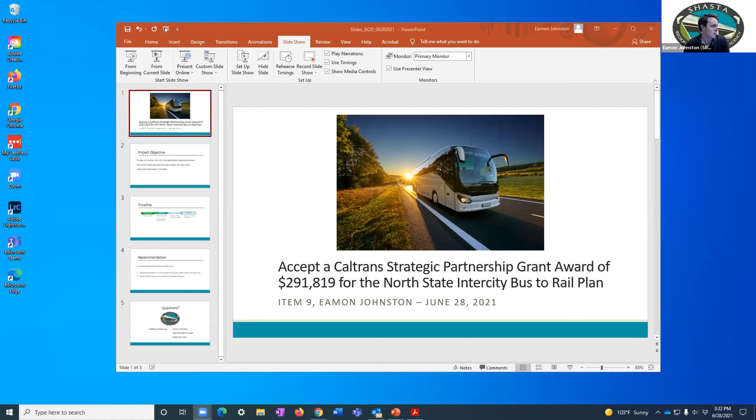So as Chair Watkins said, this is to accept a Caltrans Strategic Partnership Grant Award of $291,819 for the North State Intercity Bus to Rail Plan. The objective of the plan is to look at better intercity transportation options between the North State, specifically Redding to start, and Sacramento and/or the Bay Area along the I-5 corridor.

As a reminder, the timeline of the project is as follows: we submitted the grant application in February, and we just heard very recently, last week, that we were awarded the grant. Today staff is recommending that the board accepts this award.

Next month, after we meet with Caltrans, work could begin on the project. Although we are hoping to finish sooner, the final completion date would be spring of 2024. The recommendation is to approve resolution 21-12, attached to the staff report, accept the award, and direct staff to begin procurement of consultant services. I'm happy to answer any questions about the grant or the award.

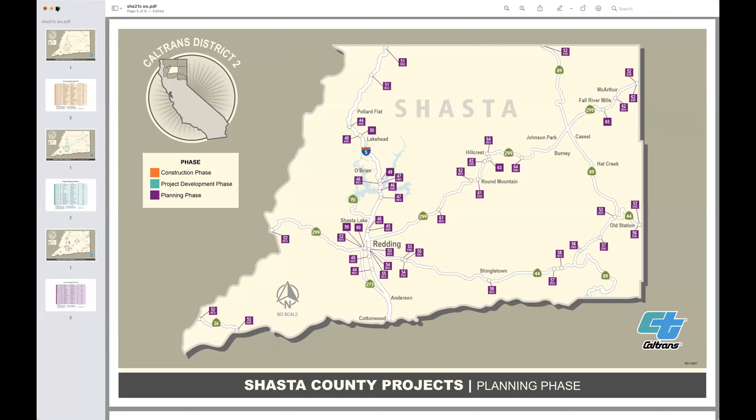I have these maps I'm going to present today. It's one more, there you go. These maps, Amy's going to make sure the board members can get a copy of them so you can look at them. If you have questions, there's names and phone numbers you can call. But what we want you to do is just be aware of all the projects that we're doing.

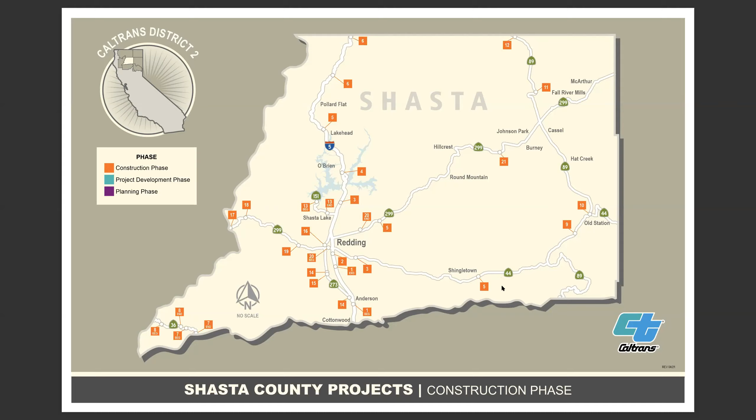So we're going to start right now with the projects that are in construction. Here's a map and you can see the numbers there. And if you go to the next page, there it is, this is what the numbers correspond to. I'll go through a few projects just so we can familiarize ourselves with the map. No, stay on the next page, that'd be better. Thank you. And if you have questions, you can ask.

So the first project I want the board to see is the Razzle project. That's a 3-year construction project, the Redding to Anderson 6-lane, and we're almost done. It's awesome, that job started 3 years ago. This is our 3rd construction year, and you probably all have gone through it. We're on our last phase. It takes 3 phases when you have 2 lanes of traffic going over the bridges, and that's why it took so long, but now we're in our last phase.

They've already placed the girders. We expect construction to complete this year. By the way, it's the other $132 million project here in Shasta County. The first $132 million project, it was kind of interesting, it was the same amount, was the courthouse there in downtown, and we beat them. We're going to be done with ours before them. I thought this was funny. So anyway, that's things have gone well in Razzle.

We've worked with the contractor, so the northern limits of the project, now you can go the speed limit, where before we had that speed limit throughout the whole section of the job, and sometimes people were frustrated keeping at a lower speed limit. But we're able to finish the northern section, and so now we just have that area around Anderson to finish.

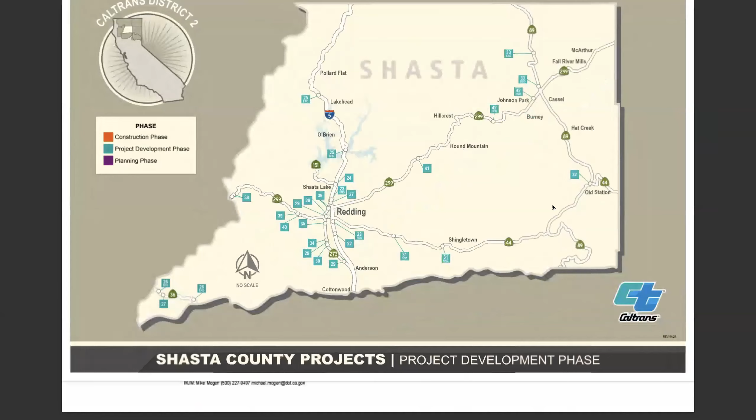Okay, so let's move to the projects in development. Next, same idea - there's the map where they're located. And so we'll go to the next spreadsheet.

Okay, now we talked about Razzle with the last project. Well, the next phase of improvements to get 6 lanes on I-5 is the Fix 5 Cascade Gateway project. That would be 6 lanes of I-5 from Highway 44 to Oasis interchange, and that would be the last improvement needed so that we'd have 6 lanes clear from Cottonwood to the city of Shasta Lake. Just like Razzle, the biggest hurdle that we have in this project is finding funds.

The normal funding process that we have, we just don't have enough, so we're asking for grants. As a matter of fact, we've asked for - I'm not sure I know all the names - we've asked for a $15 million earmark for the stimulus, we're asking for a $25 million federal grant from the RAISE program, and we're probably going to ask for another 20 million from the Trade Corridor Enhancement Program. All those are not guarantees, but we're doing our best to write the grants.

As a matter of fact, the RAISE grant, the federal grant, we're going to be getting the application in a little later next month, and we're all working hard to get that application in. We've had some successful applications, for example, the TCEP, to do the project development, but for the construction part, we still have to get the grant, and that's going to be a big hurdle.

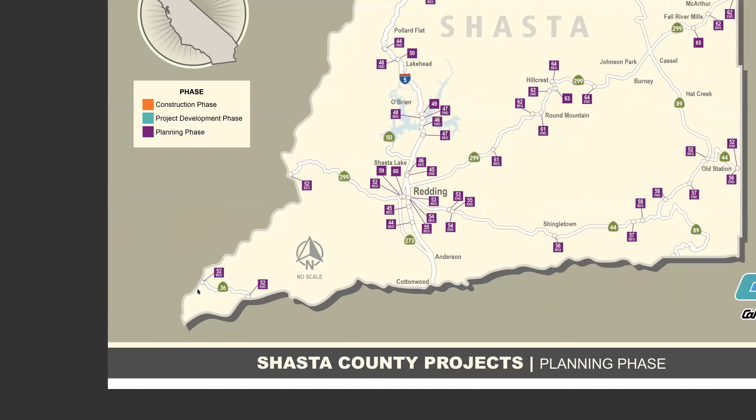So we could move to the last one, and that's the planning projects. We'll just move to the next screen there. There you go.

Now the planning projects - the further out you get, the less certain we are of it. The '22 projects, the '25 projects, we're a little more certain, but none of these have been programmed yet. Once they get programmed, we definitely know that they're going to happen. We're trying to get them ready to be programmed - we call them PIDs, project initiation documents. So these are our kind of long range projects that we have in the hopper, what we want to do.

For example, the downtown Redding CAPM, number 60, there's going to be a lot of complete streets improvements on that one, but that one's way out. For some that are sooner, we talked about the Cascade shop - that's going to be part of the Fix 5 Gateway project. Let's see, any other ones here.

We have some culvert projects on I-5. We have paving out by Shingletown - we call it Shingle Station because it's around Shingletown to Old Station. But anyway, these are all of our projects that we're just getting the PID documents for, or going to, but they're kind of out there at this point, and we'll probably be presenting them later as we get closer to delivery.

One big project I'd really love to talk about, but I can't because the person after me is going to have a great presentation, is the Pit River Bridge. You're going to forget my whole presentation after you hear his presentation because it's really exciting.

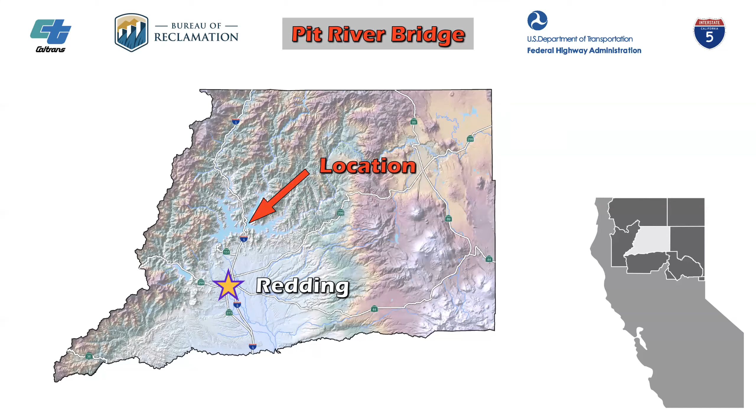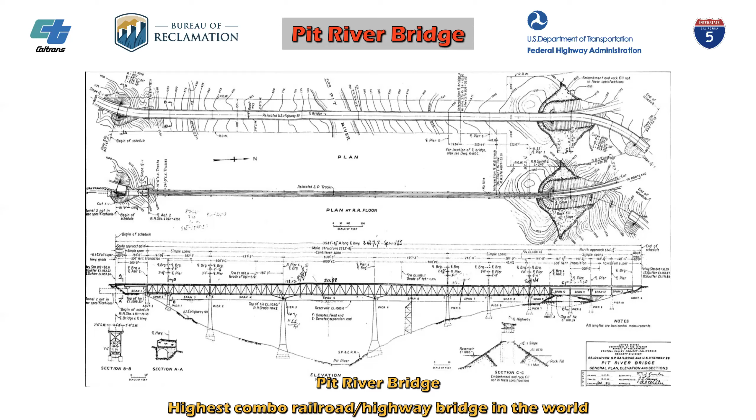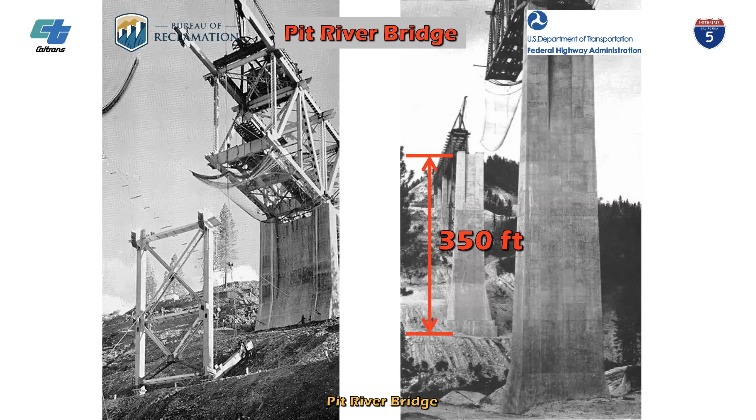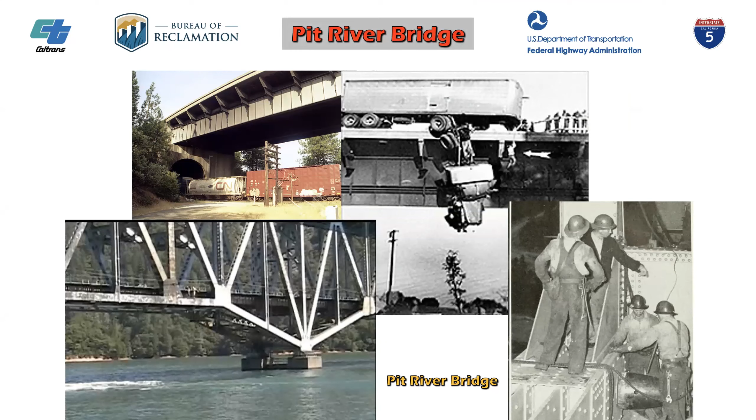Here's back when the bridge was being built, with the original Pit River Bridge in the lower side. There are some other historical photos—look at the scale on the right, how big those members are compared to the size of the people involved.

So some more on the background. As I said before, it's owned by the Federal Bureau of Reclamation, and we share it with the railroad. As many of you know, the Bureau of Reclamation is considering raising the level of the dam to store more water at the lake. We want to make sure it's fully understood that there is truly no nexus between the bridge and the elevation change on the lake—there's no connecting those two things. They're completely separate, and I want to make sure everybody understands that.

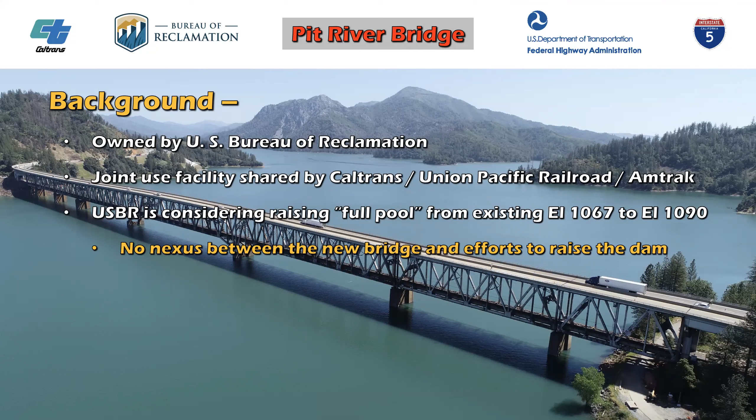So we always have what's called a need and purpose on projects, so I'm going to read this one directly. The needs at the Pit River Bridge and approach roadways include deficiencies in maintenance, operations, safety, and functional use. In 2040, highlighted in red there, the joint use agreement expires, and the bridge owner, the federal government, does not want to own the bridge after 2040.

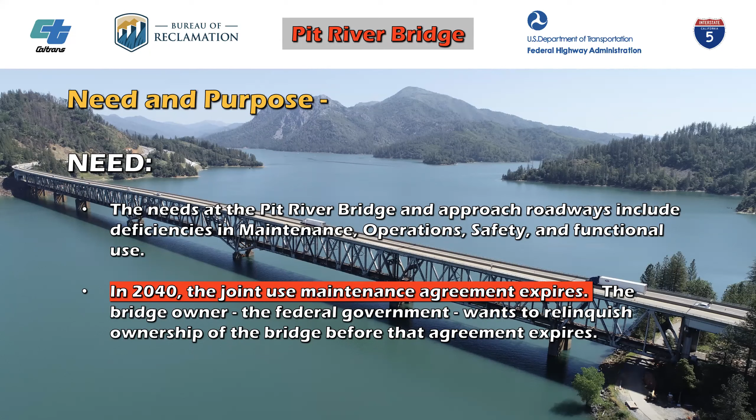Our purpose is to develop a reliable long-term crossing over Shasta Lake that addresses the future operations, maintenance, and structural needs. Long-term, beyond 2040, the interstate highway bridge specifically is not owned by the federal government.

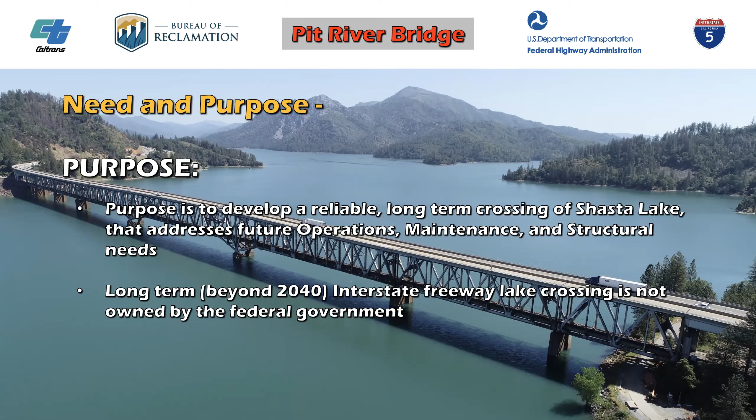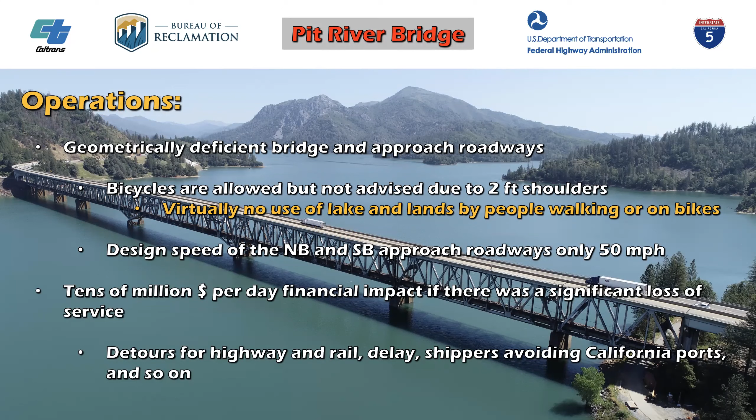I'm going to expand a little on the operations side of things. As everybody knows, it has very narrow shoulders—there are virtually no shoulders. Bikes are technically allowed to cross the bridge, but I wouldn't do it. Anyway, there are other things going on there.

What we've done is figure out what happens if our bridge is not crossable. For instance, during the Delta fire a few years ago, we had issues and couldn't cross the bridge. Here's the detours involved. For highways, it's almost a 60-mile detour to go around through Highway 89 and 299 via Lake Britton—about 60 miles. If the rail can't go over that bridge, the red line shows the LA detour. If the railroad had to detour around the Pit River Bridge through Salt Lake City, believe it or not, that'd be about a 500-mile extra detour. And if they had to do it from the Oakland side, that would be an almost 1,000-mile detour to get through our area up to Portland.

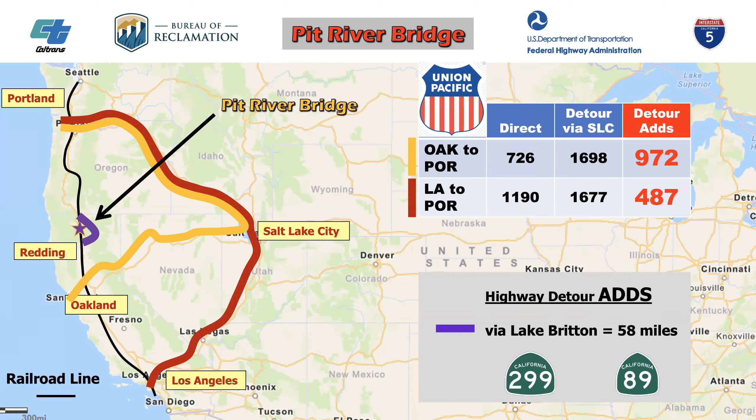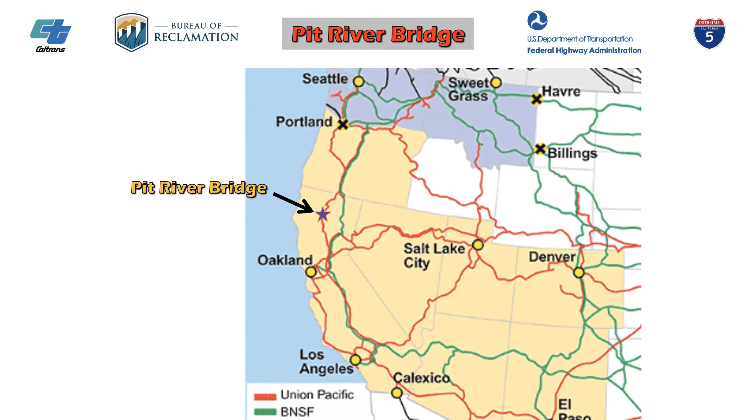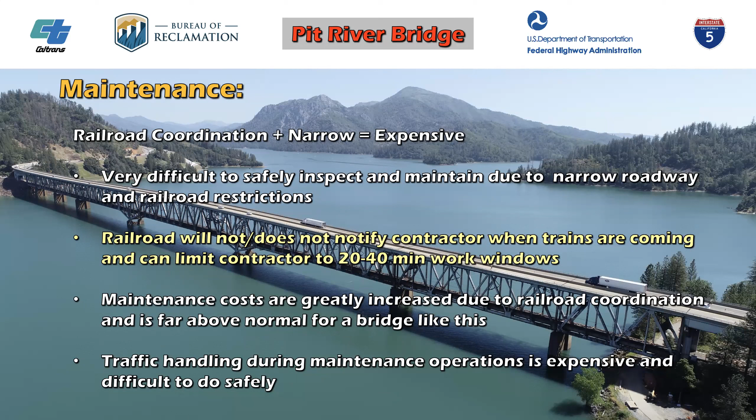Next slide, back again, and then the next one. So for maintenance, I'm going to highlight a few things. It's really a problematic bridge to maintain with the railroad there—it's very expensive and a very difficult maintenance situation with the railroad for the last 80 years. They just have a different set of ways of doing things.

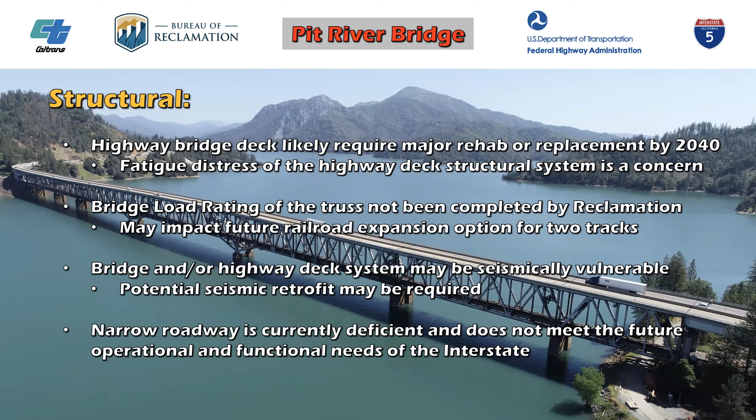Structurally, we have some other things I'll highlight. Basically the deck has been replaced a few times recently, and it continues to be a problem, along with some other structural concerns. I'm trying to go fast on this as best I can—I don't want to dwell too much in the details.

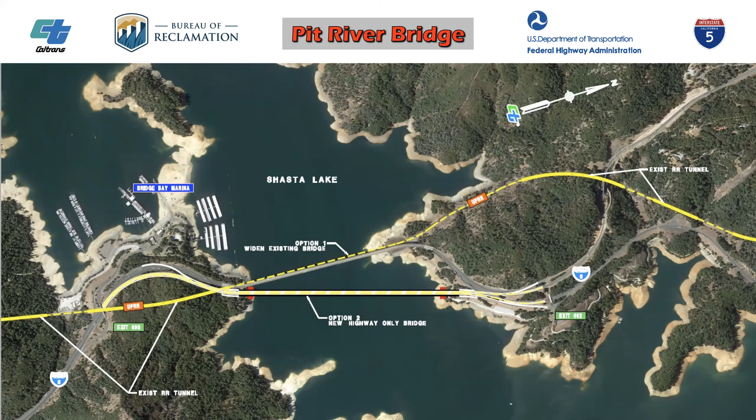Right now, here's the aerial view of the lake, looking straight down from the top. Redding's off to the left, Oregon is off to the right. That yellow line shows the existing railroad tunnels—believe it or not, there are portions of 5 railroad tunnels on that photo, starting at the left and going through to the right. You see our main existing bridge right there in the middle with the dashed line on top—that's existing option 1. You see the Bridge Bay Marina off to the left. There's an interchange just on the south side of the bridge, exit 690, and exit 692 is just on the north side. We're also showing one of the alignments we're considering for a highway-only bridge, where we'd start basically on the south side of the lake but bow out a bit on the north side.

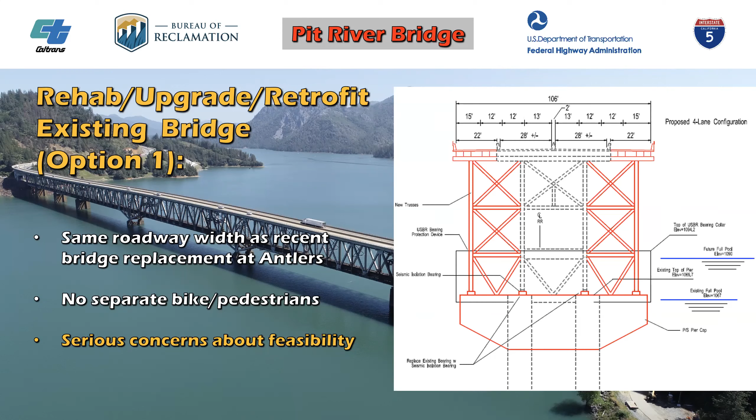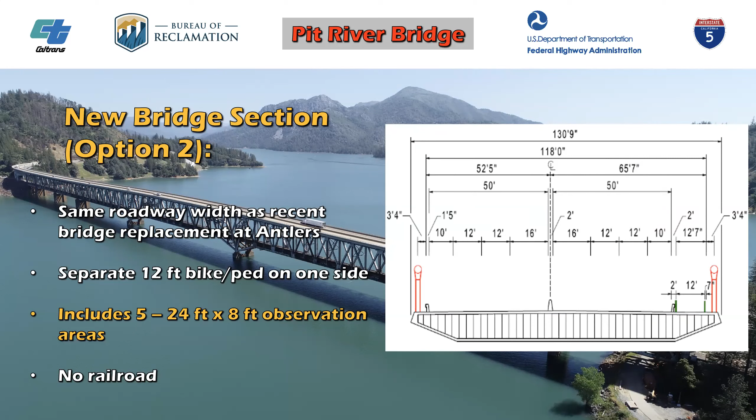On this one, we're also able to add a multi-use path on one side, a 12-foot wide path where bikers and peds could go both directions, like Eric was talking about previously, but there'd be both directions on one side. Key to the whole thing is no railroad here - this is highway only. Next slide, please.

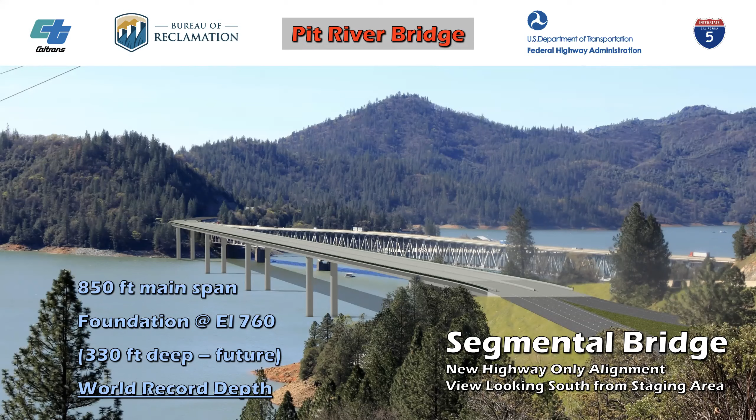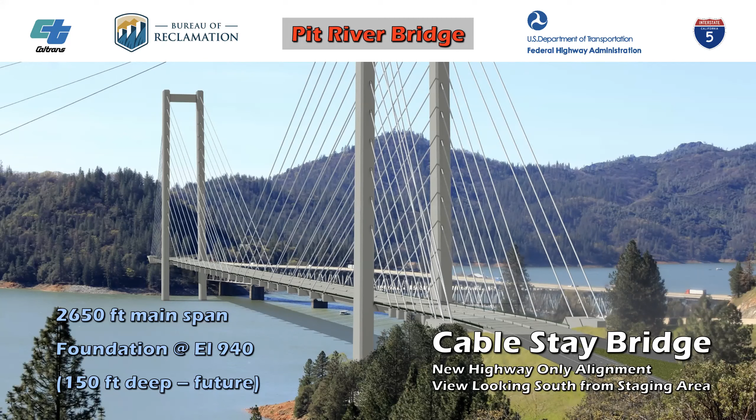The main span here would be a little over 2,600 feet long, and at that length it would be the largest cable stay bridge in the Western Hemisphere if we did something like that. So next slide, please.

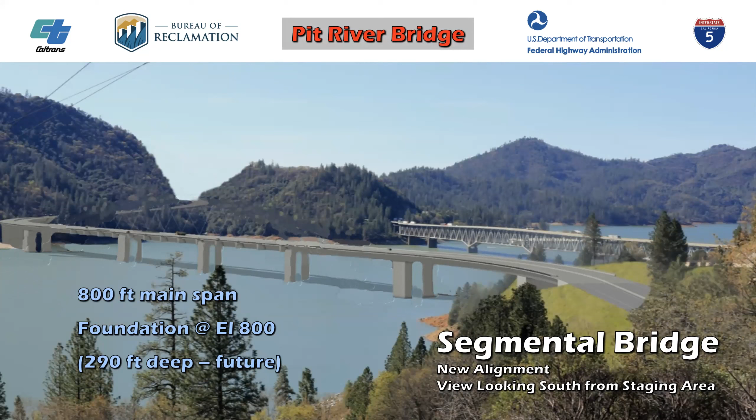Here we also considered a segmental bridge on a different alignment. When the water gets a little lower, you guys can see some little ridges where we could possibly do an alignment. Still super deep water, long spans - another thing we considered. Next slide, please.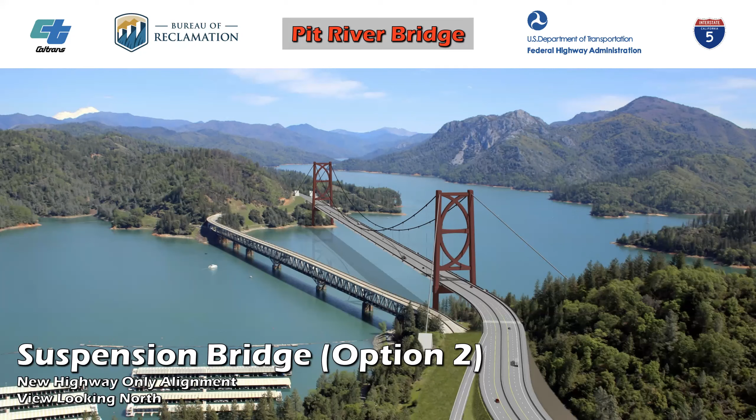The color of the bridge, we chose that to be - obviously it's all under future consideration - but that happens to be attempting to match the color of manzanita brush. There's lots of manzanita up there, like dark brown or purple is what you might see in the manzanita. So anyway, that we happen to pick that color. It's up for discussion, of course.

Next slide, please. So here's how this would compare to the Golden Gate Bridge. Depending on which alignment we use, our main span would be between 80 to 90% as big as the main span at the Golden Gate Bridge. This is a big deal - about 3,450 feet to 3,800 feet long for the main span. The Golden Gate Bridge, as you see there, is about 4,200 feet long. As you can see here, it's a single span suspension.

Question? I'm sorry. So anyway, the bridge tower is there, but it's between 80 to 90% as big as the Golden Gate Bridge.

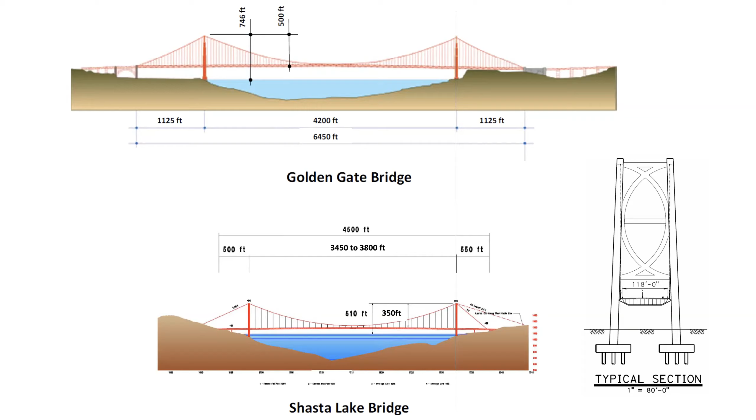Next slide, please. So while we're looking here, this is another view of the top. What's also going to happen on this one, we have to have a major contractor's staging area on the north side of the lake, and a major contractor staging area on the south side of the lake. Once the project's over and those guys go home, we could convert those into perhaps vista points to look at the bridge. Go to the next slide, please.

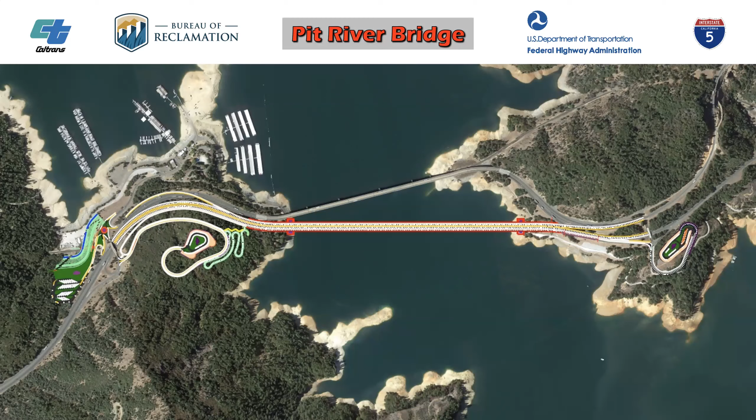For instance, this is up at the north side of the bridge. Off to the left there, you can see the bridge tower with the blue part - that's the tower. Off to the right would be what was the construction staging area, what could someday eventually turn into perhaps a vista point where the bike path would connect back and forth. We told you that there'd be a joint use path on one side of the bridge. It turns out if any of you have been down to the Golden Gate Bridge, they have vista points on either end of the bridge as well. It turns out this one here, the distance between our vista point and the tower is about half the distance as it is at the Golden Gate Bridge. So it'd be right on top of the towers.

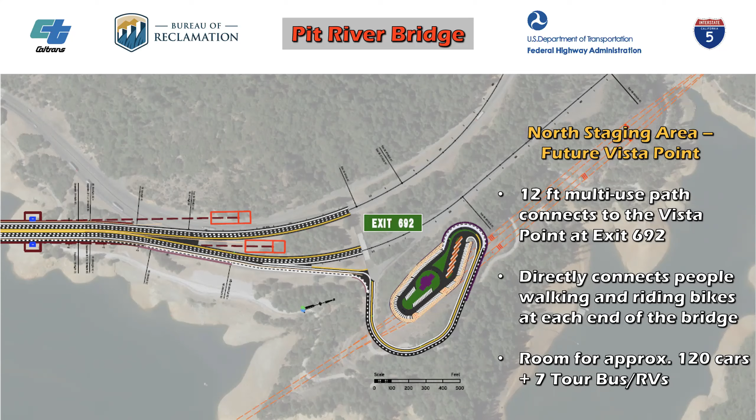Next slide, please. And there'd be a similar thing on the south where we'd have a chance to have a very closely set vista point just to the south of the towers. You see those couple of things that are in red there, just behind the towers - we actually have to angle the cables that connect to the bridge. We have to angle them away so that they don't interfere with the railroad tunnel. We have to do that little tweak on the construction to avoid the railroad tunnel. Next slide, please.

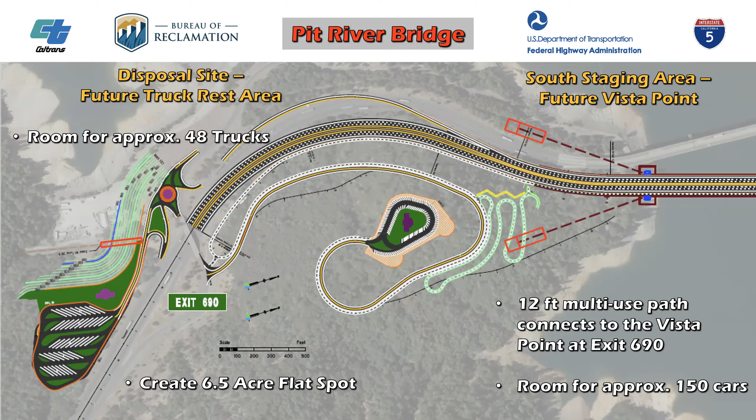So what happens to the existing bridge if there's a new one built for highway only use? The railroad will stay on the existing bridge. It'll be converted to a railroad-only bridge. Most likely we'll take the bridge deck off, even though it does provide some protection to the trusses and tracks, like a roof. So it may or may not make sense to take that deck off. We may leave it, we may take it off. But it would be upgraded to last 50 to 75 years and stay in place as it is.

Some of the feedback from our stakeholders: the railroad would like whatever's least impactful to them. FHWA is a big partner and is 100% in support. Reclamation is also 100% in support. Forest Service, since this is on federal land with the park and National Recreation Area, would like to limit impacts to recreation and the environment. Tribes aren't necessarily a partner, they're a government entity, but they're aware of the need and we've been meeting with them intermittently, with more meetings planned. Our congressman supports the project as well.

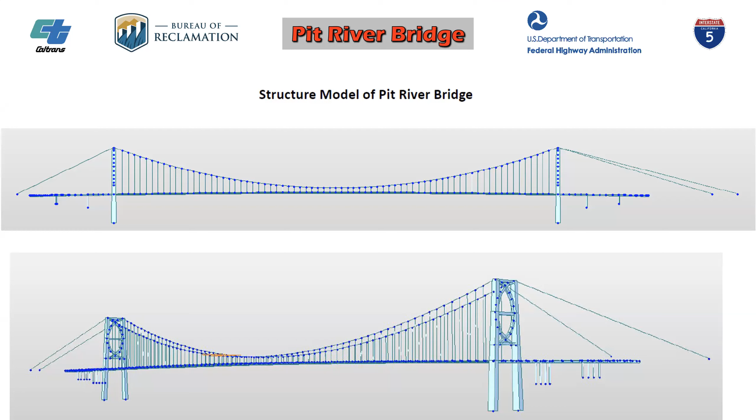Next slide, please. Here's the tower, nearly 600 feet tall, between 80 to 90% as big as the Golden Gate Bridge, depending on what alignment we choose.

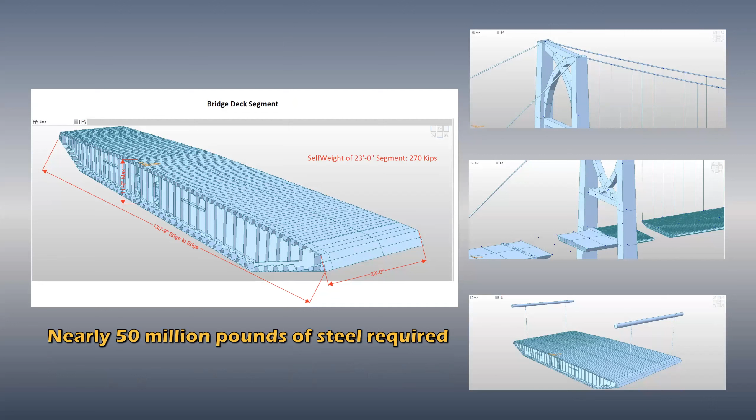Next slide, please. Some other cool stuff from our structures folks, showing a whole bunch of different things. On the left is each segment, trying to make as big a segment as possible to ease construction. For those who remember the Sundial Bridge, it shipped down the highway in big segments a few years ago. This would be similar - how big a segment can we create to ship, whether on the highway or rail lines, to get it there? This one here is about 130 feet wide by 23 feet, and about 11.5 feet deep. We're trying to figure out how big a piece we can build, say in Seattle or Oakland, and get it to our location. Turns out building a big bridge in the mountains is a lot harder than building one by the ocean - getting the material to the site is tough.

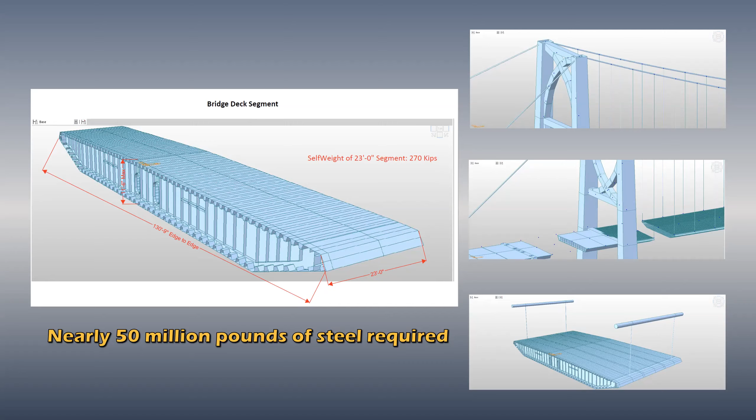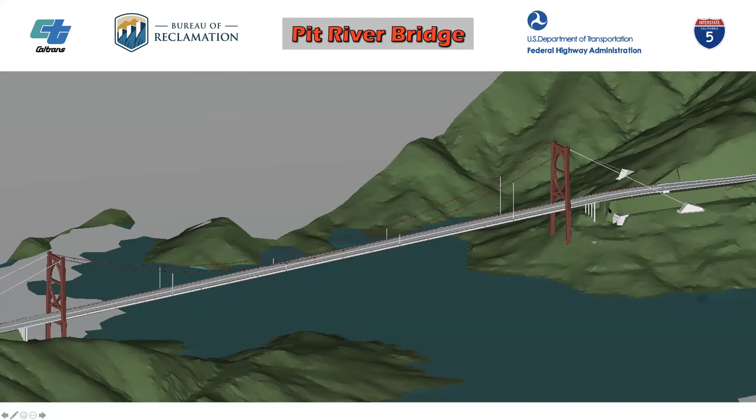Next slide, please. So here's what's coming up with our next steps. We are working on that project initiation document, and as I said, we're going public. This particular project will probably have at least one public meeting where we'll go fully public and people will be able to weigh in on things.

We're going to be engaging with our partners going forward, and the PID we plan to be completed next summer. If we come up with a solution that we're happy with, Caltrans will be able to take over this new bridge and consider it part of our inventory. Since we don't own the bridge, it changes everything - it's very difficult to work on this project.

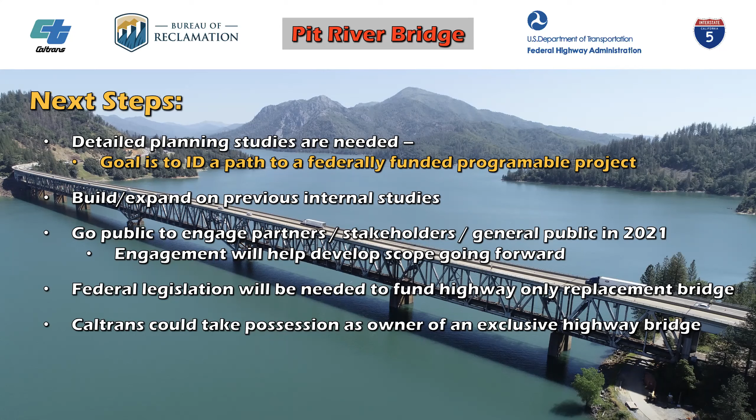Basically that's it, that was my conclusion of my presentation. I'm willing to take your questions and comments at this time. Did any board member have a question or a comment?

This is Leonard, I have one. Will this bridge be built so that if something does occur with the dam, it won't matter? Will this thing be high enough regardless? Significantly, yes, that's a very good question. It matches the terrain - it's significantly higher than the existing bridge. On the south end itself, it's about 75 feet higher than the top of the existing bridge. So it's significantly higher, mostly to line up with the railroad geometrics and the exact hill beside it on both the north side and the south side.

Thank you. Any other comments?

Well, Dale, I have a few. I thought I saw photos when the piers were initially constructed, that the Bureau constructed, that they were wider at the bottom, planning in the future to have a parallel bridge already made wider. But I didn't see that in your original schematics of the existing piers. Yes, at the bottom they're tapered all the way up - it's kind of good engineering practice to design it that way. They were not built for a second set of lanes.